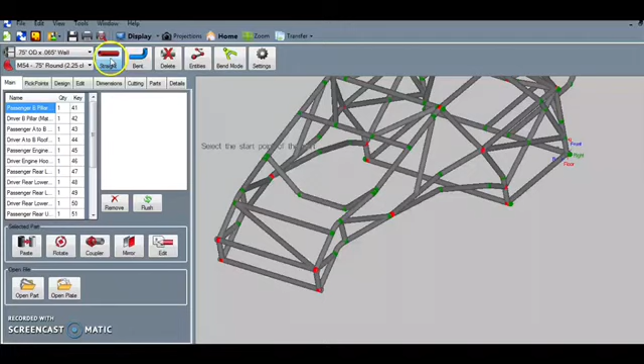So the first tube is going to go from this corner to this corner, and as you can see, we've got a straight tube there. The second one, hit straight again, it's going to go from this corner. And as you can see, Bend-Tech, when we created that first tube, it automatically enters a new pick point in the center of that tube.

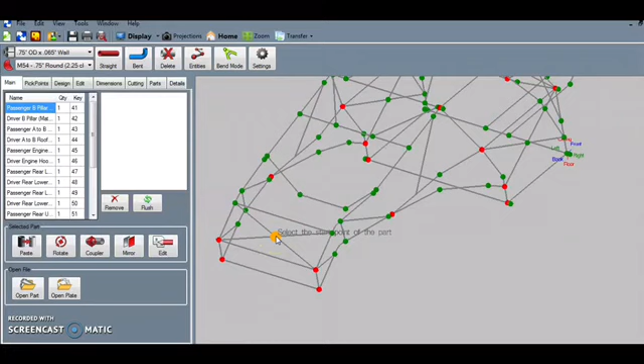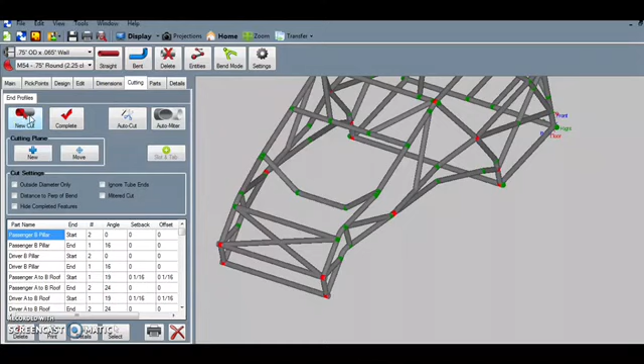And so all we have to do is select the center of that first tube and then do the same thing for here on the lower side of this X, connect it in the center, and there you go. We have an X. Now, what we don't have yet is the coping wrappers for these 3 tubes. And so let's do that now. So we go up here into the cutting tab and hit new cut. So let's start on the first tube, new cut, and let me zoom in here.

You select this first tube and then you select the tubes that will create the cutting profile. So as you can see, these 2 tubes are creating the coping profile for our new tube here. So hit complete and you can see the profile that it creates. So let's do that on the end of this tube. So go back up here, new cut. Select the 2 that create the coping profile, hit complete.

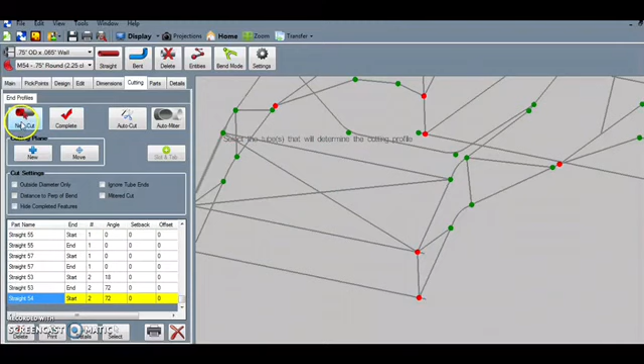Do that again for the second tube. This is the tube we want to cope. That's the coping profile on the start. Complete, new cut. This tube, and we're going to select the center tube because we're going to cope it into that tube. So hit complete. Got one more left. There and there. Complete. Complete. So there you have it. There is our new tubes. 53 start and end, 54 start and end, 55 start and end.

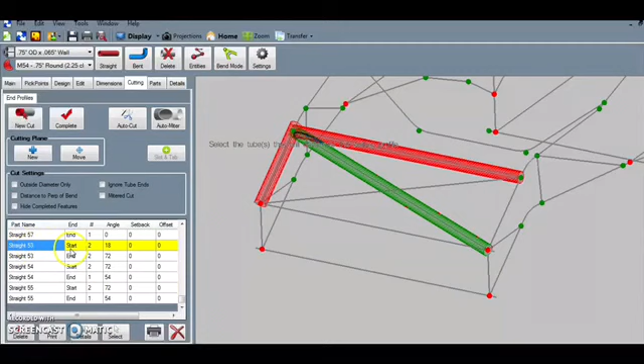So once you have these coped, you can go into the details. So I'm on 53 start. It's this coping wrapper. Hit details. Let me zoom in here. This is the coping wrapper details that Bend-Tech is spitting out at us. You'll print this out on your computer and we'll use this when I get in the garage.

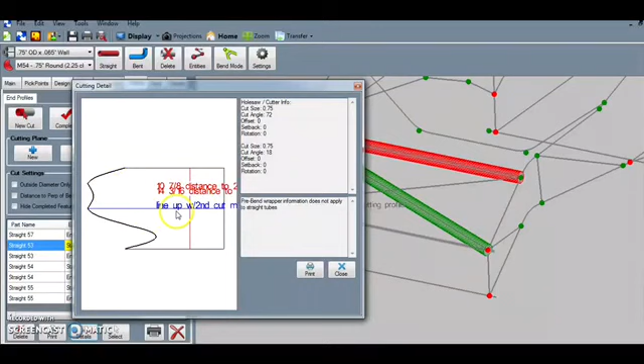For the sake of this tutorial, I'm not going to hit print right now, but I'll see you in the garage in the next video and I'll show you what to do with this. So, see you in a bit.

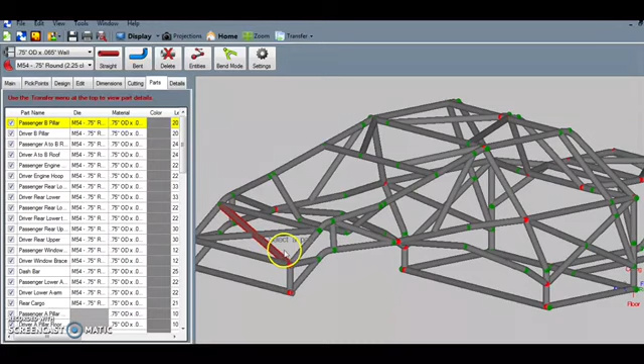So before we head to the garage, we actually need to gather the information that we're going to need to cut these tubes to length, in addition to the coping wrappers themselves. So let's go over here to the parts tab, and when you're on the parts tab, if you just select any of these parts, it'll take you right to the tube that you want to print the data for. So let's start with that first one. Let me zoom in here. It's highlighted red. So let's click on that and you can see it's straight 53.

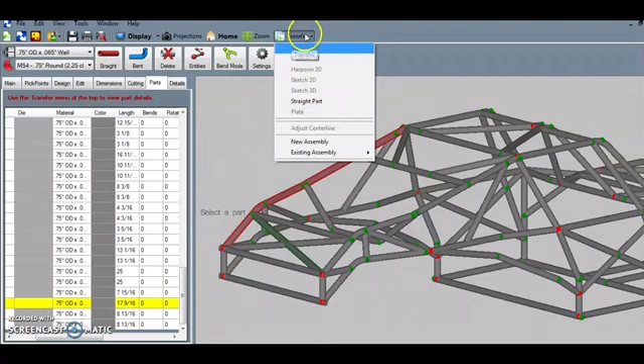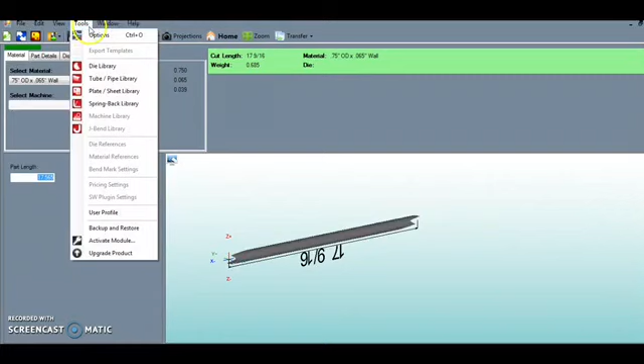So straight 53 has a length of 17 and 9/16 inches. So you can either write that down and go to the garage or your work area and cut your material to 17 and 9/16, or you can transfer this to a straight part. So you go up here to the transfer tab, straight part, control print, and it'll print a data sheet that will have this information on it. It'll give you your cut length, your material, the weight, if you have that inputted into your die library or material library.

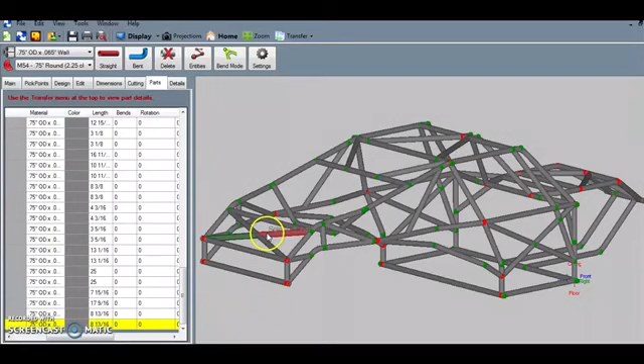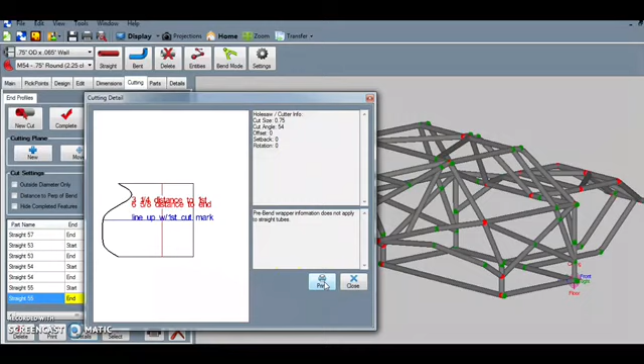So for this example, let's just write this stuff down. So I'm going to say 17 and 9/16 is this main tube. And then, straight 54 is 8 and 13/16, and straight 55 is 8 and 13/16. So we've got our 3 tubes, and we know how long we need to cut each one. So once we have that, like I said before, you go to the coping wrappers, details, and print these details out. And then we'll have everything that we need when we get to the garage to create these tubes.